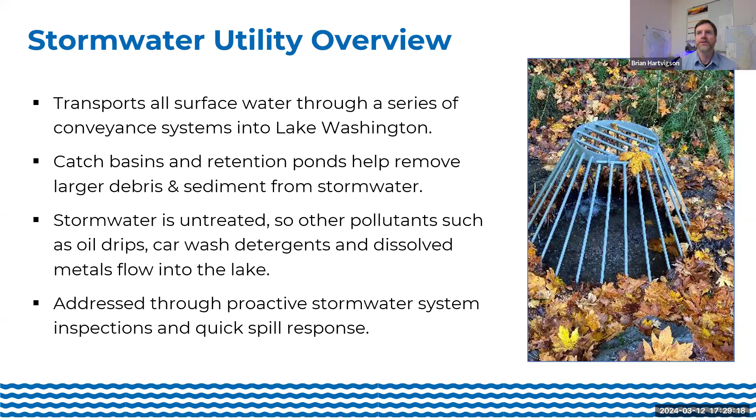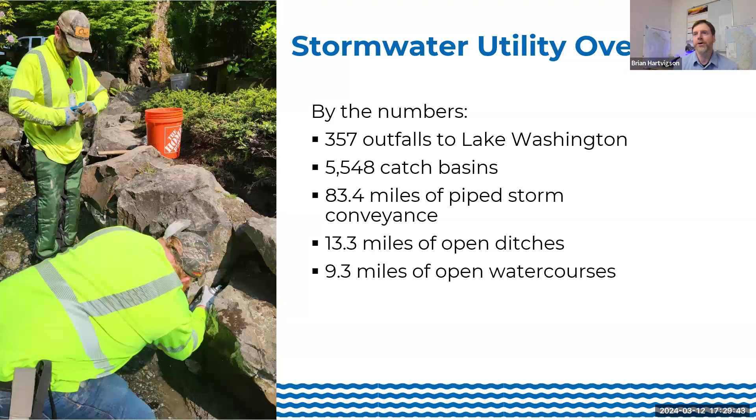So these are some of the numbers of our system. It's a pretty extensive system for a fairly small island. We have 357 outfalls into Lake Washington, 5,548 catch basins, 83 miles of piped storm conveyance, 13 miles of open ditches, and 9 miles of open water courses. Next.

So one of our operations is system cleaning. Our storm pipes are routinely jet cleaned to remove roots or other blockages to keep them free flowing. We have Vactor service that addresses the catch basin sumps that collect the sediment. We remove that sediment into the vehicle, and then it goes to our shop where we have a decant facility. That water and sediment mix is decanted onto the pad where the liquids are discharged into the sewer system for additional treatment by King County. The solids are dried under a covered area, and later our staff dispose of them at a regulated facility.

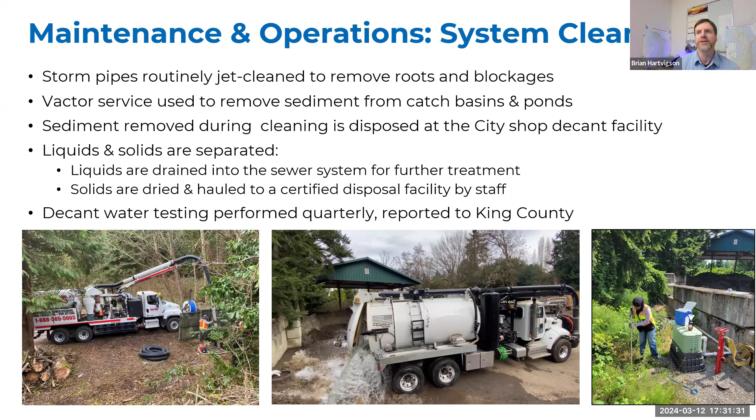On a quarterly basis, King County requires us to do a report on the liquid content of what we're discharging. They're mainly looking for heavy metals concentrations and settleable solids. We have some photos below that depict this process. On the left, we have a Vactor working on a retention pond, cleaning out the sediment. In the middle photo, we have our decant facility where the Vactor is dumping the water and sediment mix where it's separated. And on the right, we have Decca taking water quality samples for the quarterly report. Next slide.

One of our key operations is doing some camera inspections of the pipes to see what condition they're in and see if we have blockages. The pictures below, this is our staff member and our in-house equipment. To the right, you can see the screen, what the camera picks up. That's root intrusion within the pipe. He's also doing some repairs with some jet set around the catch basin that were needed.

So this is a combination of in-house and contracted work. This is coordinated with our jet cleaning process. Typically, we run into issues like this where there's root intrusion. So you need to actually have the jetter handy to clean the pipe so you can do a full camera inspection and actually see the condition of the pipe.

We also do targeted inspections in advance of all the capital roadway overlays, so we can repair any issues that we observe before we overlay the roads. We don't have to excavate a newly paved road to make repairs. So also, any of the defects that we find, some of the smaller ones, staff make repairs, but significant ones are loaded into our capital improvement projects.

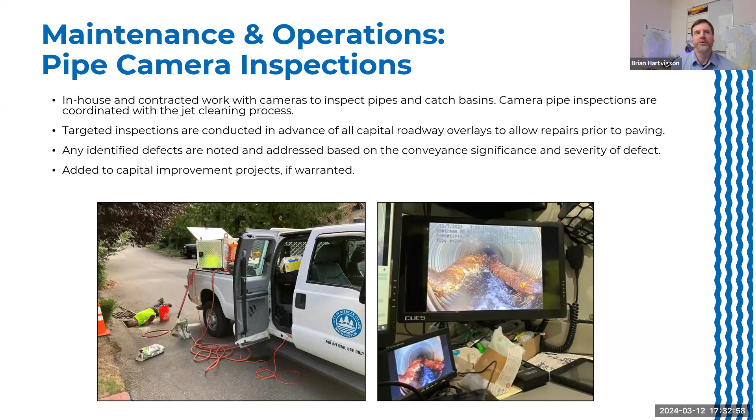Some of our maintenance and operations here. We do address minor repairs in the pipes. This is an example of one on 44th. We had a sinkhole that emerged, so the team excavated and then uncovered a collapsed concrete storm pipe from the 60s. And we replaced that with some resilient ADS pipe on the right-hand side, backfilled and repaved.

The larger repairs, such as pipe slip lining or large segments of pipe replacements, those are funded from the capital improvement division. Pipes are always replaced with the best material we can find with a life expectancy of greater than 50 years. Some other common repairs and replacements.

We have a catch basin on the bottom right, where we had bricks as a riser on the top of an old catch basin. This was from the 50s. The bricks deteriorated, caused another sinkhole. We excavated, removed the bricks, replaced it with a cast concrete cover, so it has much more resiliency and conformity.

And then on the left, we have an example of a ditch where we armored the system with specific rocks that are set up to capture sediment and also reduce erosion. So everything's brought up to current standards when we do these procedures.

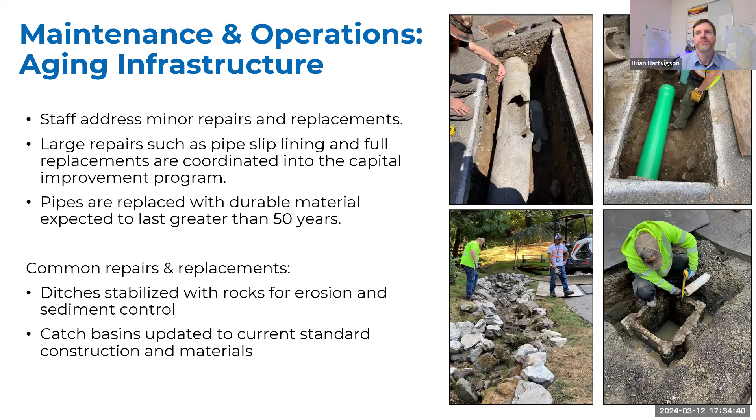One of our common response efforts from staff is for illicit discharge events. Really, an illicit discharge is anything other than rain that's entering our stormwater conveyance system. So typically it's oil drips. It can be from construction sites where there might be sediment running off from exposed soil. There could be equipment failures like from garbage trucks. They might have some hydraulic lines that burst and spill onto the roadway.

So once it's observed or reported, we have a quick response effort where we get out and try to prevent any of that spill from reaching our conveyance system and moving its way downstream. Here on the left, we had an oil spill. We don't know what the source was. It was just a vehicle that was spilling oil as it was driving around. So we had to go to several locations. But we use a product that helps break up the oil, and then we follow up with the street sweeper.

So this is a fairly significant staff component where last year we had 84 reported discharge events, and it does take time to do this field response. After we do the response, we report to Department of Ecology as to the results, and this is all required under the NPDES, which you'll hear about later.

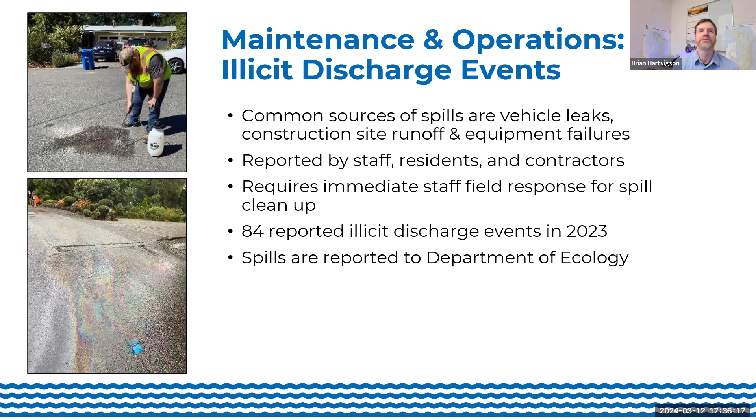Here is the street sweeper, which is important in that previous situation. So we have a routine sweeping frequency, and it's based on arterial, residential, or town center zones. And year to date, we've done 51 miles of arterials, 16 miles of residential, and 11 miles of town center. We do the town center the most frequent. It's the most used visible site where you have a lot of metals and brake dust from frequent braking.

We have a lot of catch basins that collect leaves, and it's fairly flat topography-wise. So frequent sweeping helps keep our system free of debris, and it hopefully reduces the amount of pollution entering the catch basin sumps and downstream.

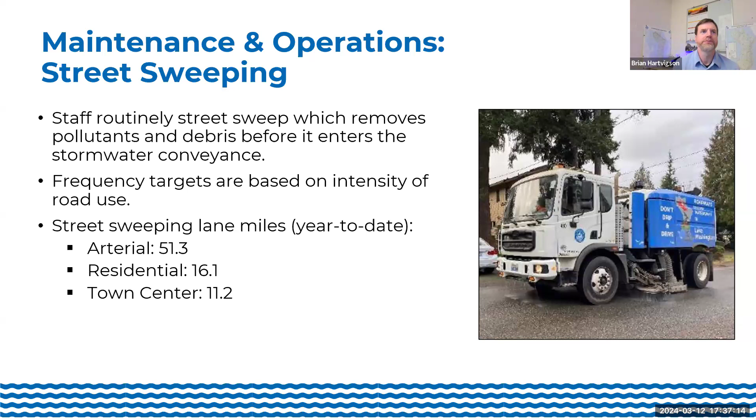So generally, for our maintenance and operations, a lot of our activities are outlined and required by the NPDES permit and Department of Ecology. So for that segment, Deca Roble is going to cover that. Thank you, Brian.

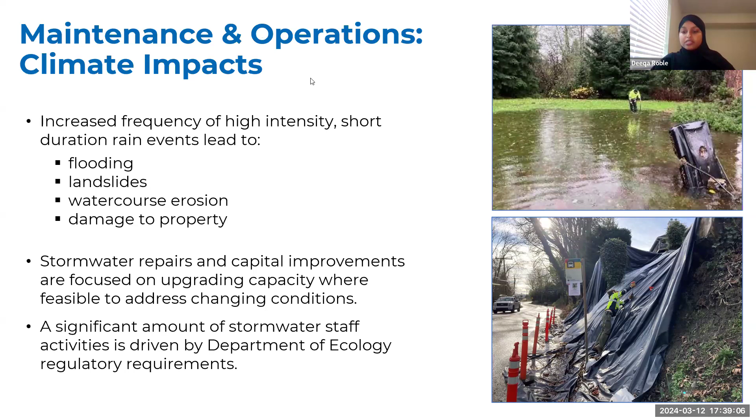So the National Pollution Discharge and Elimination System, also known as the NPDES, was created in 1972 by the Clean Water Act, enforced by the EPA to address point source pollutions that discharge into water bodies, and it is administered by the Department of Ecology. It consists of 8 components, as you can see on the screen. The current permit is from 2019 to 2024. Those 4 components that are in bold will be the ones we'll be going over in this meeting today.

The first component is stormwater planning. So stormwater planning consists of monthly interdepartmental meetings with various departments within the city. So this includes GIS, utility engineers, CPD, and parks and natural resources. And so we focus on discussing new and ongoing stormwater programs and projects because stormwater spans over various areas. So it is important that we are coordinating our efforts. We also take this time to compile data that is required for the annual NPDES report to the Department of Ecology.

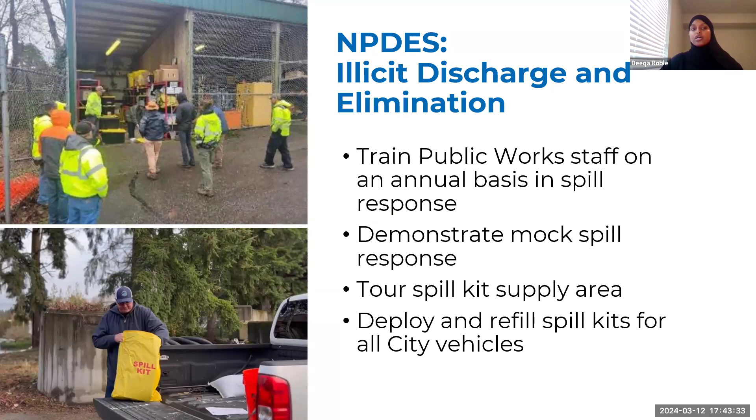And also we have implemented a procedure where every city vehicle has a spill kit, so that there isn't any time wasted in terms of coming back to the shop to grab materials. Everything is already ready to go. And so this makes sure that we are efficient at responding to spills and reducing stormwater pollution.

A new component of the NPDES is the source control program, which was recently implemented in 2023. And so the purpose of this program is to inspect businesses, because businesses can be a point source of pollution. So that can be anywhere from grease, from oils. For example, we had an instance where a business was reported, where they were seen washing their greasy floor mats outside, right next to a catch basin.

And so we are required to inspect businesses that have been reported, but we also have an inventory of at least 13 businesses we need to inspect. And so we inspected 13 businesses in 2023. And we also updated the city code for source control inspections and enforcement. And so this allows us to go into businesses and inspect, making sure their standards are up to code. And if they're not, it could be a way of educating them and providing resources so that they can meet the best management practices to reduce stormwater pollution.

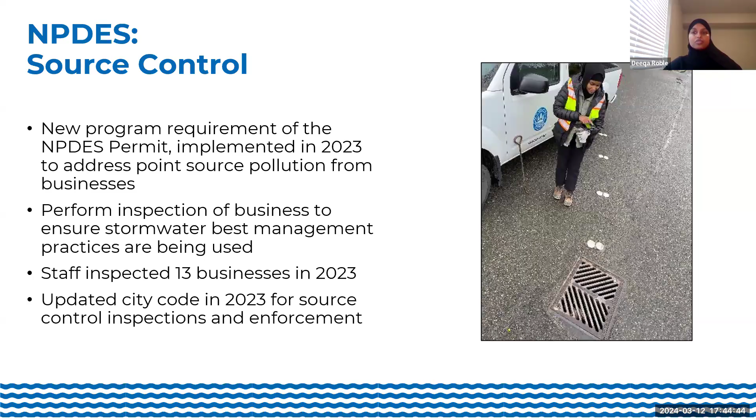The next steps. So the next steps are to implement the new 2024-2029 NPDES permit. It will go into effect August 1st of 2024. We will also enact a new behavior change campaign. This will be a dumpster lid campaign focused on making sure businesses are closing their dumpsters and making sure they're locked, because it can be a source of illegal dumping and stormwater pollution.

We are also going to continue to evaluate technology and equipment options to enhance our stormwater inspections and repairs. And we will also continue to train our staff in the use of pipeline condition reading software. Any questions?

If I can unmute there. Yes, I'm sure there will be some questions. I'll open up. Any member of the board? Meredith, I see you have your hand raised. Yeah.

So a couple of questions, and either of you can answer this when it makes sense. You know, on the Vactor service that you described, Brian, I don't quite know how to ask this in an intelligent way, but maybe you can answer it better than I can ask it. Of all of the places that one might Vactor, do you hit some percentage of them every year? Do you rotate through a set schedule? It's a combination, yeah.